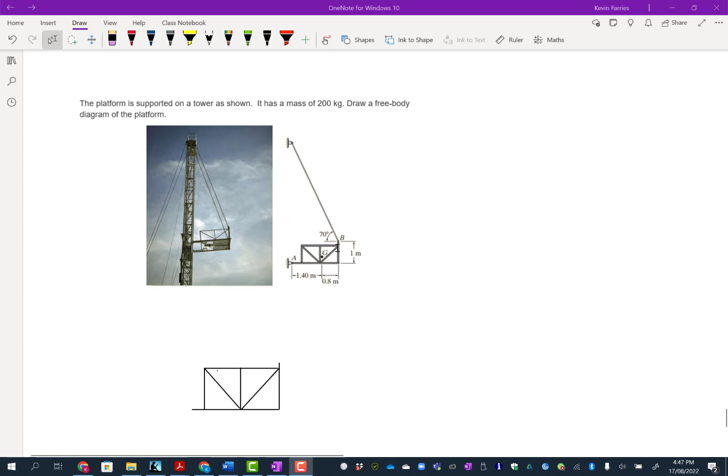This time we've got a platform that's supported on a tower. I think it's off an oil rig or something like that. It's got a mass of 200 kilograms, and they've kindly shown us where the centre of gravity is, and they've dimensioned it. And so we would just probably show something like that. Just show a little centre of gravity symbol. Remember what those are like, so it's like that, and then you colour in those two bits.

Now in this case, that's all good. There's not too much more to say. So I've drawn a little free body diagram. To be honest, I haven't done it to scale. We're interested in the platform itself. So we've got a support here by a cable. So we need to replace that by a force. And that cable is stopping this platform falling in this direction. Okay, so it must have a force going in the opposite direction.

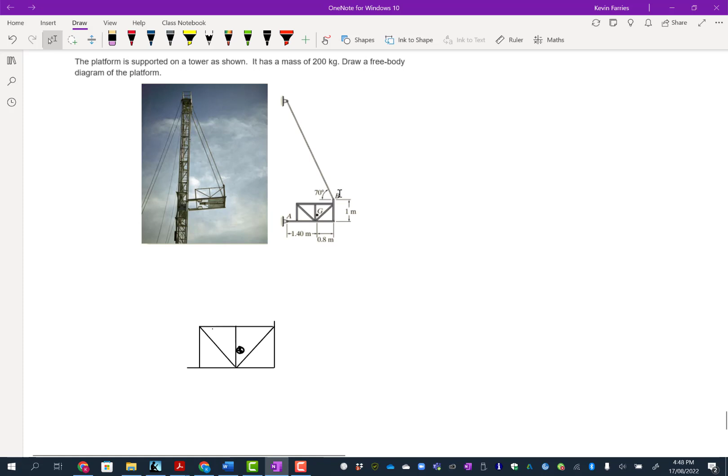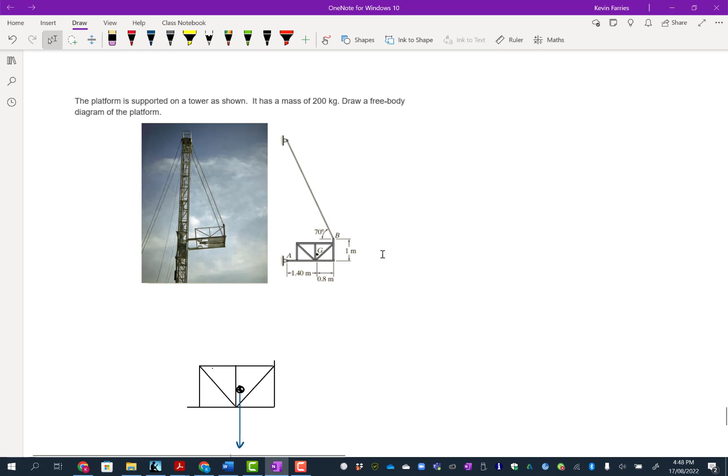And so, that's a reaction force, we should start with the primary forces first. There's nobody in this apparently. And so the primary force would just be gravity, or the weight, sorry, it's not really gravity, that's not a force, it's an acceleration. The weight is a force. There's a mass of 200 kilograms, so we want to figure out what that force is.

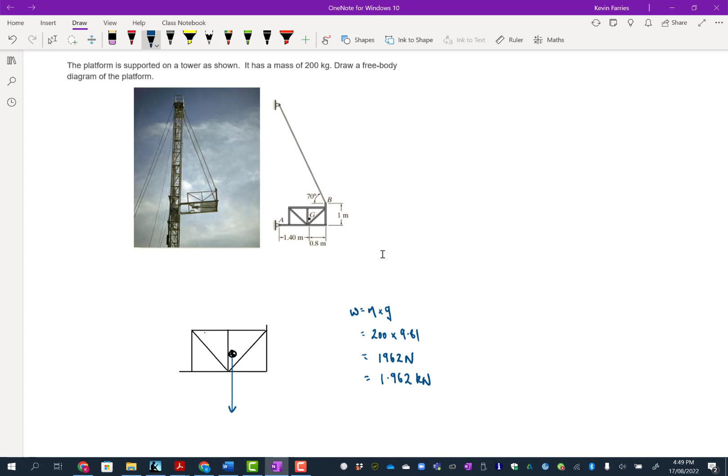So weight is equal to mass times gravity, which is equal to 200 kilograms times 9.81 meters per second squared, which is equal to 1962 newtons, because we put in kilograms, so it's coming out in newtons, and I'd probably just change that to kilonewtons, 1.962 kilonewtons. That's okay. So now we can put that value on here, 1.962 kilonewtons.

Did I do that before? I did. Just check and actually put the forces on. Okay, then we've got all our primary forces because the gravity is the only one. Now we just have to be careful here. So what we're doing is we're taking a three-dimensional object and we're simplifying it to a two-dimensional problem. We can do that because it's all symmetrical, but we just have to be careful about, this is the total weight. Okay, this is the total weight of that platform. This looks like it's just one cable, but really there's two cables there.

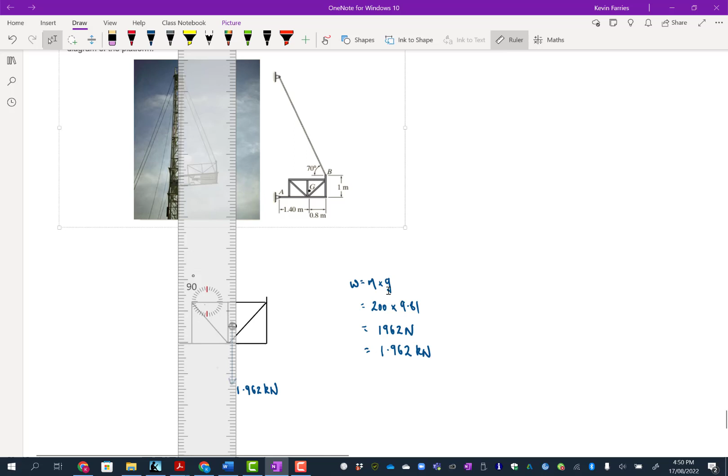So if we do all the calcs, and let me just draw on that cable now, or the force. We won't draw the cable, I'm drawing a free body diagram here, but what we will do is draw the force associated with that cable. So that cable's stopping it falling down the way, so the force is going in the other direction. We'll call that F1, say, or R1. Let's call it R1. R1 is in that direction.

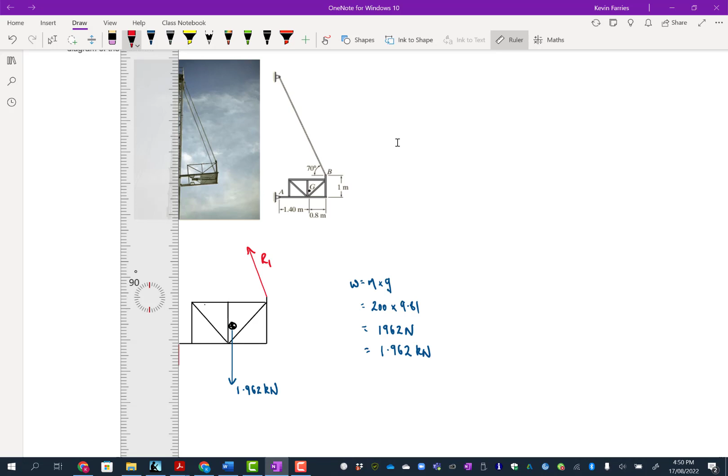And then what we've got down here is a little pinned connection there. So if you either figure that out or look it up, it can't stop rotation, but it can stop translation in any direction. And so you need two components, and those two components can add together to give you translation in any direction. So you're going to have a component like so, and another component like so. This is going to be R2Y, say, and this is going to be R2X, something like that.

And we're going to figure out what those are. I've just drawn them in the positive direction. I think they would actually be that way because it's going to want to rotate this way, so we're going to need some kind of moment. Anyway, that doesn't matter. Now, why was I telling you to be careful? You've used the total weight here. And so if you do all these calculations, this reaction is going to be the total reaction in both of these connections, because you've used the total weight.

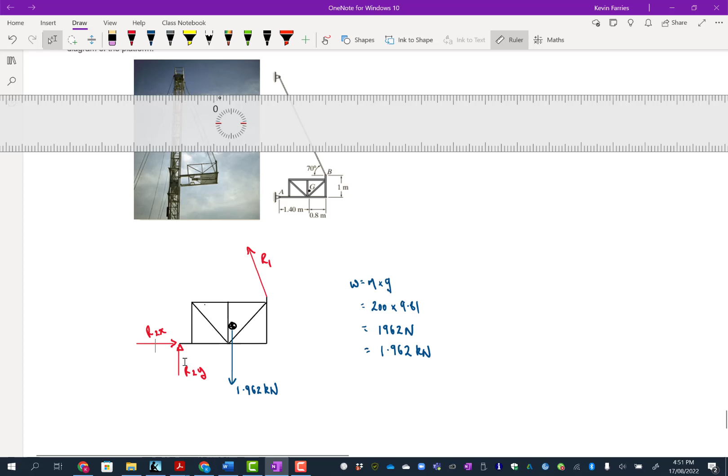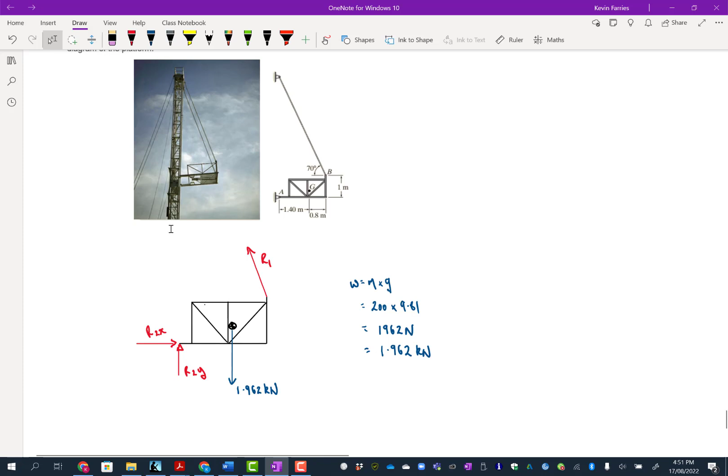So at the end, you'd have to divide all of those by 2 to find the reactions at one of those or in one of those cables. An alternative would have been to just calculate the reactions here with half the weight, because only half of the weight is going to go to each side. But just be aware of that if you're taking a three-dimensional problem and turning it into a two-dimensional problem.

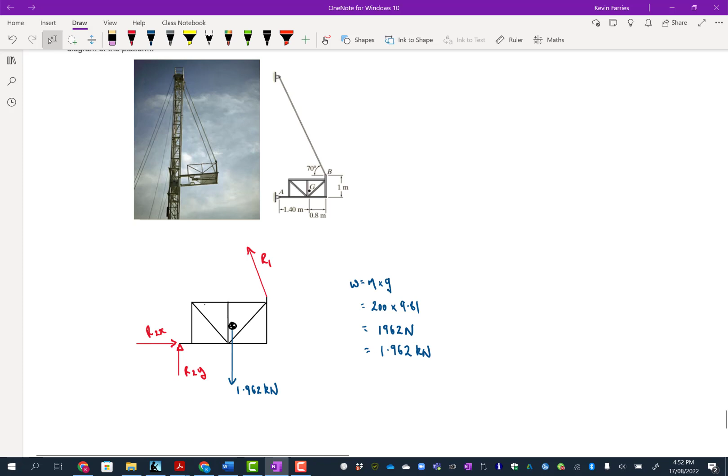Nothing wrong with that, but you just have to be pretty careful about thinking about how many components are causing this force, and then divide at the end. If more than one of them are responsible for that force, divide at the end. Hope that makes sense. Quick one, next one.